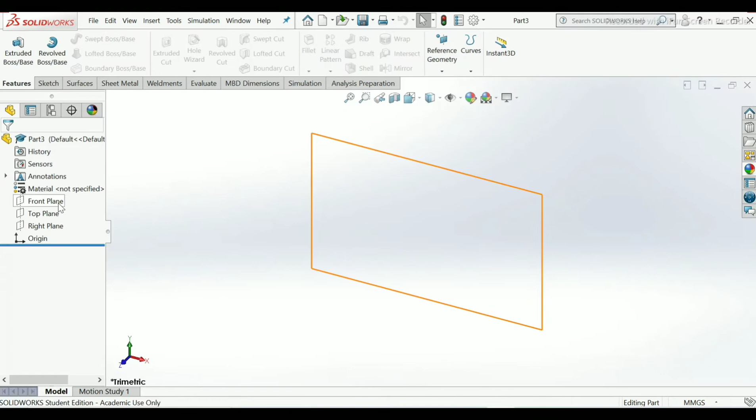So I will start to make it. Select new part. Okay. Take front plane sketch. Make two lines of different direction. That is, first in vertical direction to origin. Second is horizontal direction to origin.

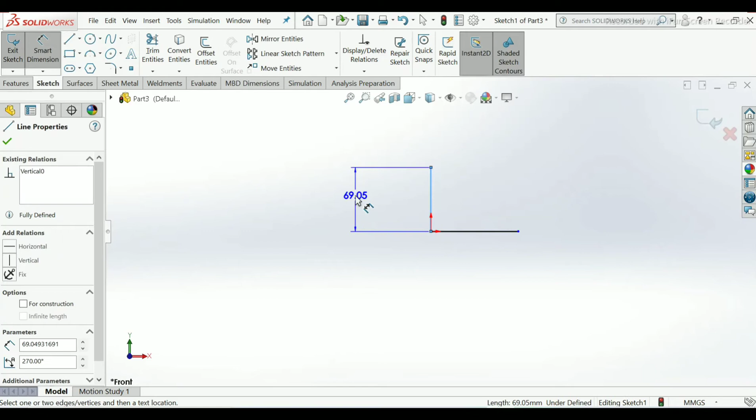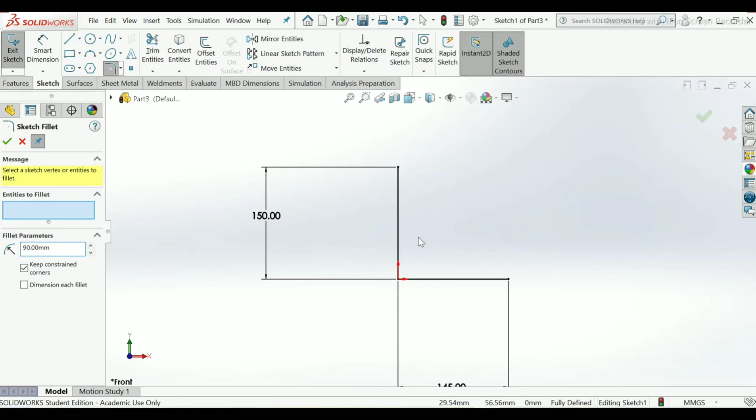Apply dimensions here. Take this vertical line as 150 mm. 150 mm. And this line take 145 mm. Okay. Select fillet, 90 mm. Okay. Exit the sketch.

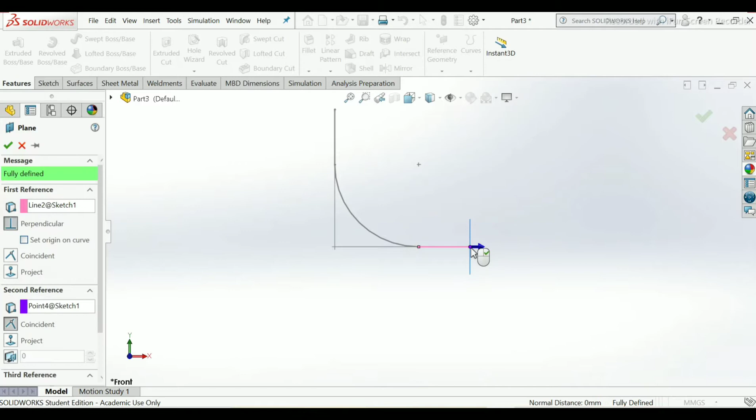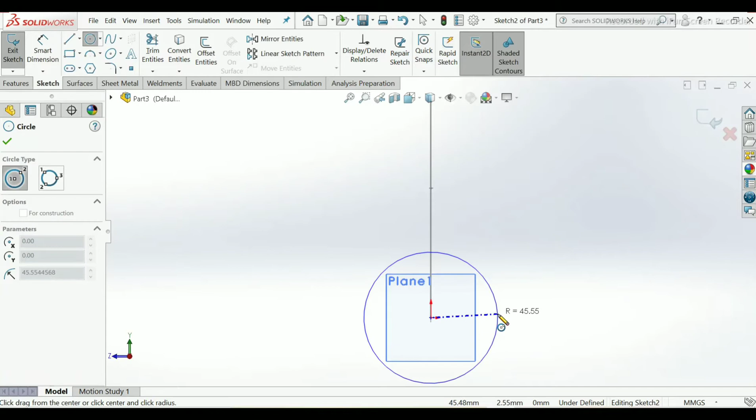Take reference geometry plane. Take this line. Select this point as a second reference. Click OK. Select this plane. Sketch. Normal to profile. Select circle from command manager. Take this circle, start from the origin point. Give this circle a dimension 97 mm diameter. Okay. Exit.

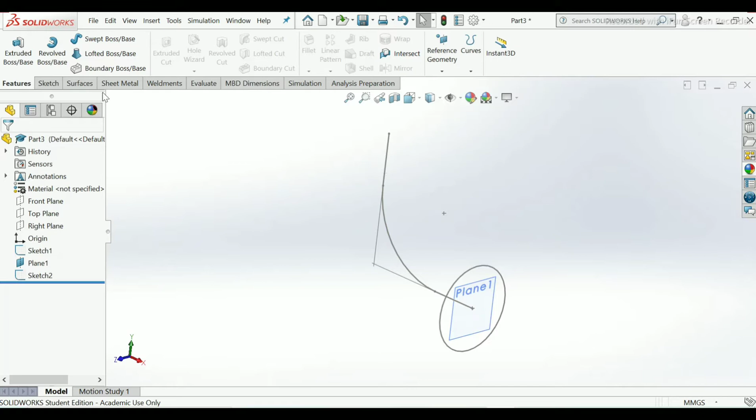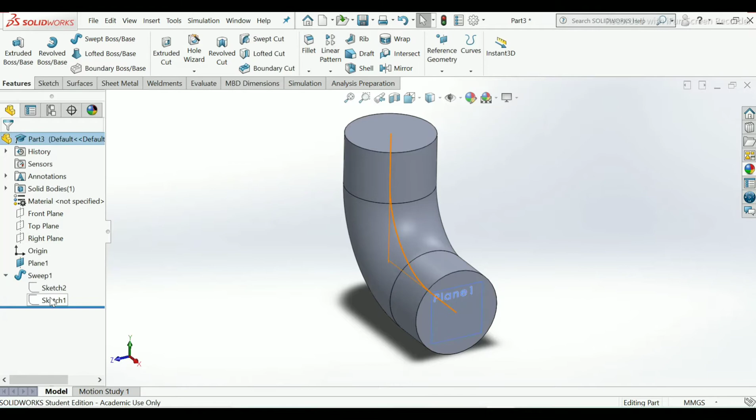Make sure that the line will be continuous. To make Swept Boss, select Swept Boss base, profile as a circle, path as this sketch. See, our Swept Boss is made. Click OK. Show this second sketch, first sketch.

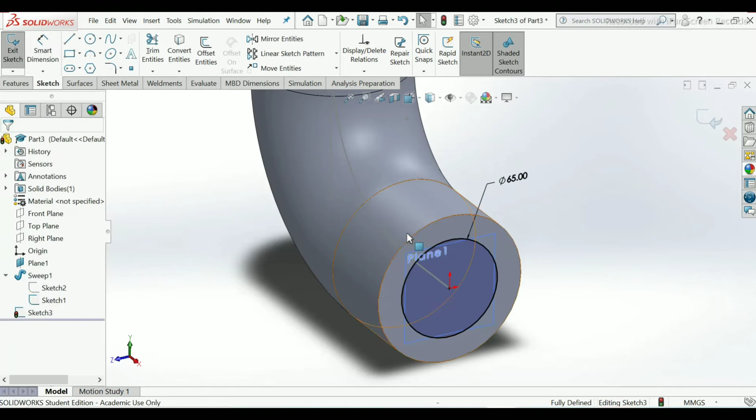Now again select plane, sketch, make one circle, so that it will make a hollow sketch. Now this circle will be 65 mm diameter. Okay. Exit. Use swept cut. Already the sketch was selected for profile circle. Now select path line. Okay. Our hollow component has been made.

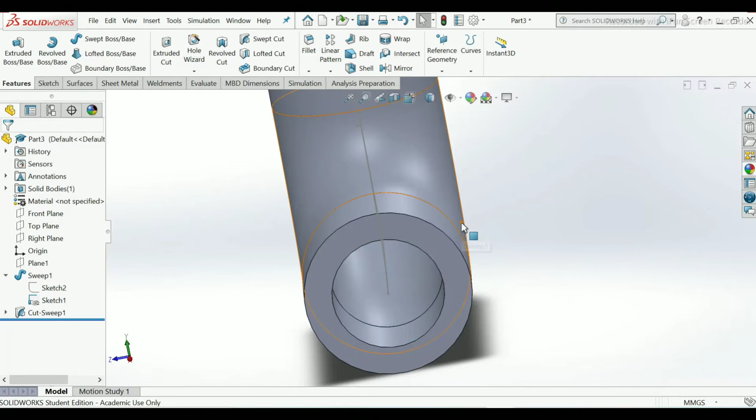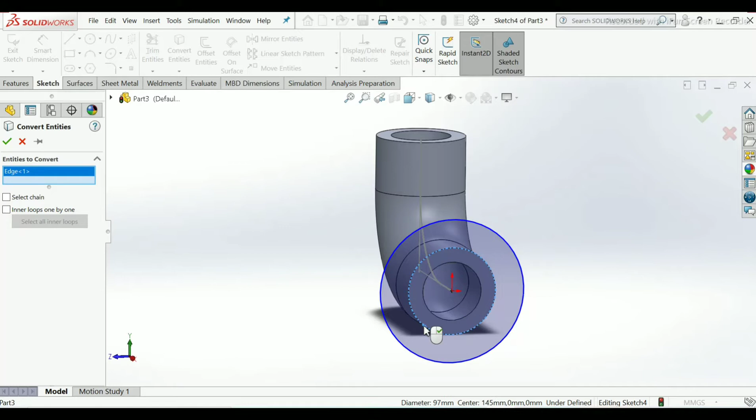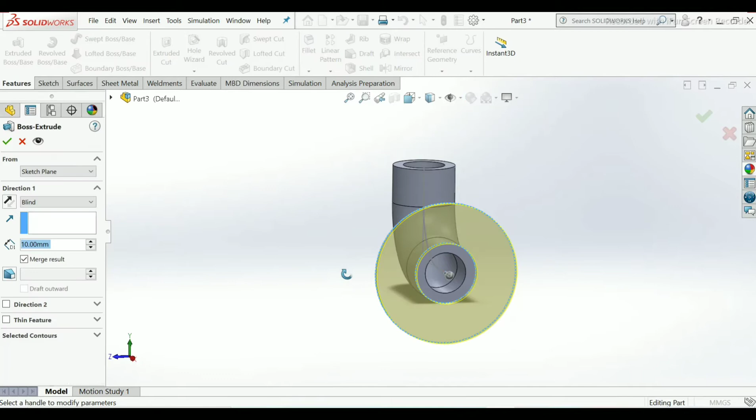Now hide this plane 1. Select this hollow section. Sketch. Normal to profile. Circle. Convert entities. Convert this projection line of bigger circle. Select diameter. Exit. 25 mm thickness will be okay.

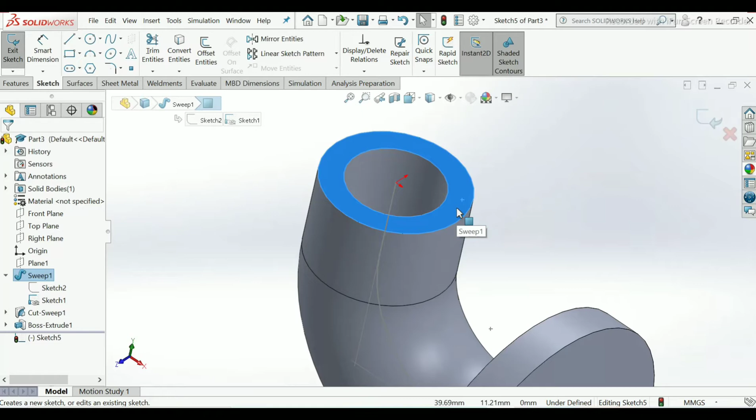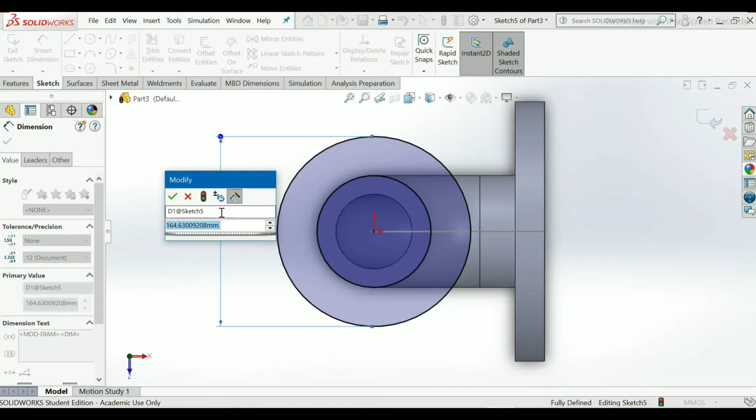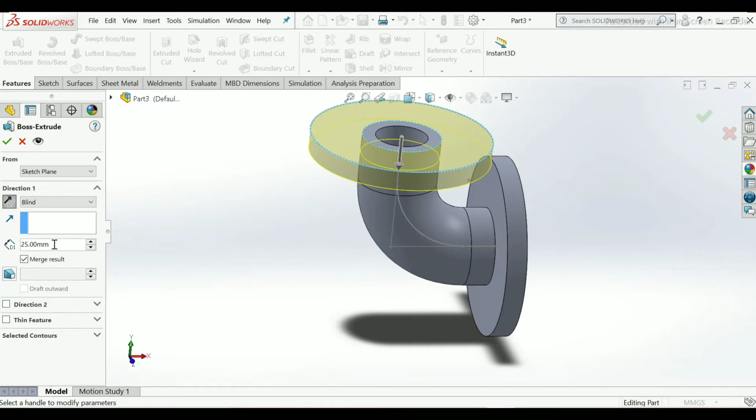For upper portion, select sketch this plane, hollow section plane. Normal to profile, circle, make this diameter as 225 again. Okay, exit the sketch, extrude as same procedure. Change this direction from reverse direction downwards. Thickness will be 25 mm. Click OK. Now hide this sketch 1.

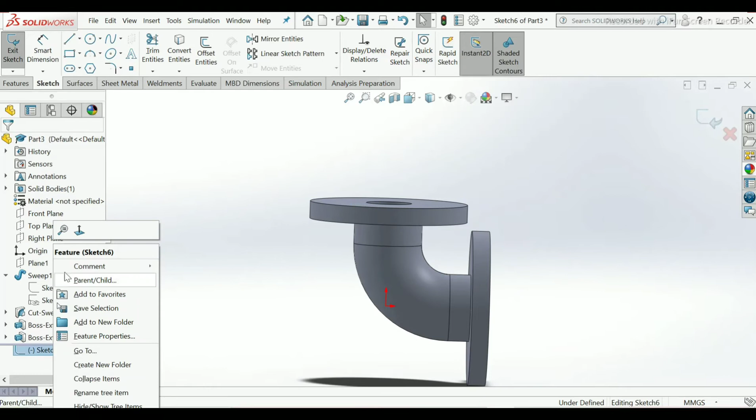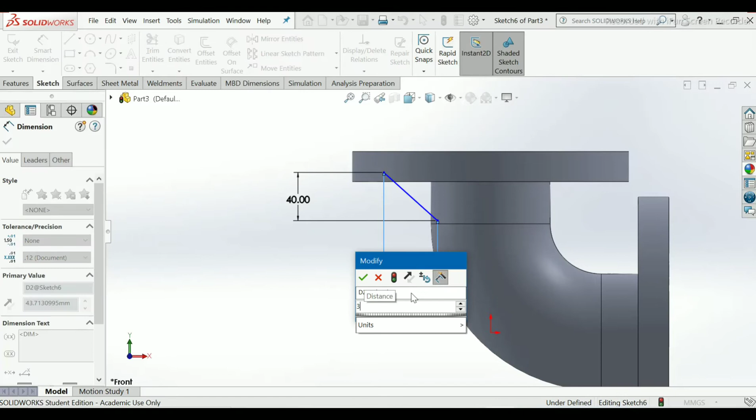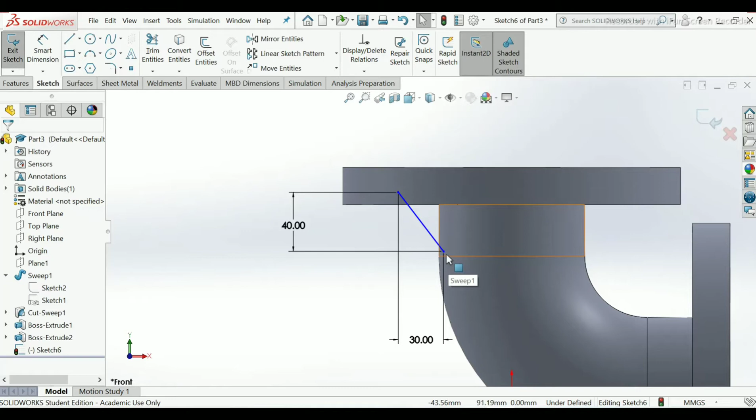For rib I will choose front plane sketch, normal to profile, select line, give the dimensions from point to this point. Height will be 40 mm and distance will be 30 mm. Make sure that for rib the line will be just little bit inside of the model, inside of the extrude material, so that rib will be properly made. Now confirm this sketch.

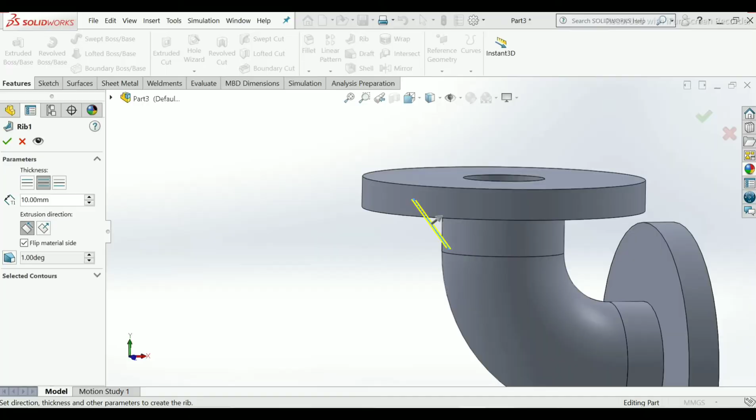Take rib command from command manager, from features. This goes outside, so I will flip the material side inside. Thickness will be 10 mm as shown in figure, 2D drawing figure. Click OK. Our rib has been made. I want to make 4 ribs in this section, so I will choose linear pattern.

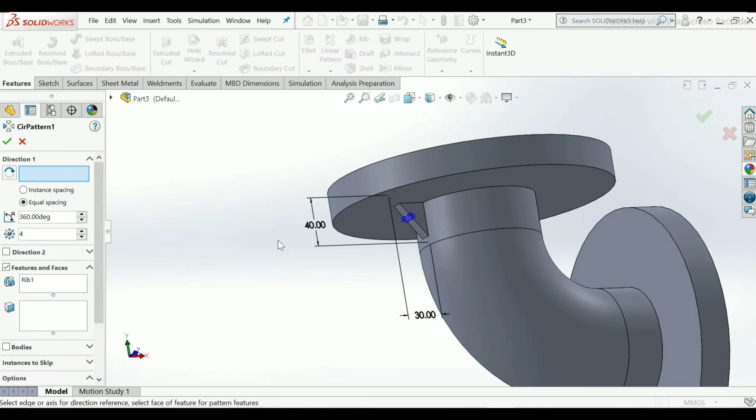From linear pattern select circular pattern, rib already selected. Choose the direction. I will choose this edge of this circle, extruded circle. See, it automatically selected. Number of instances will be 4. Click OK.

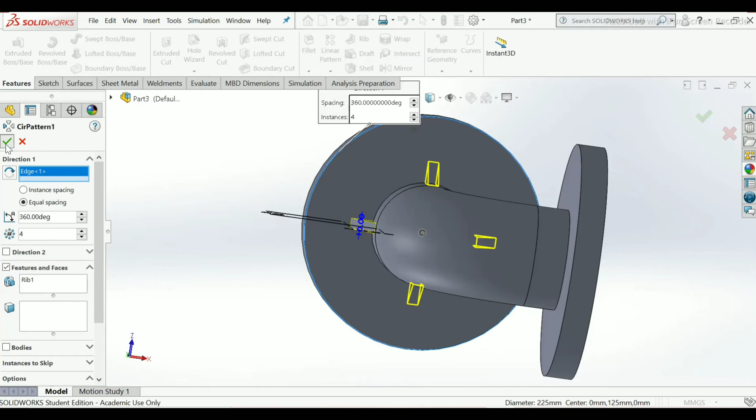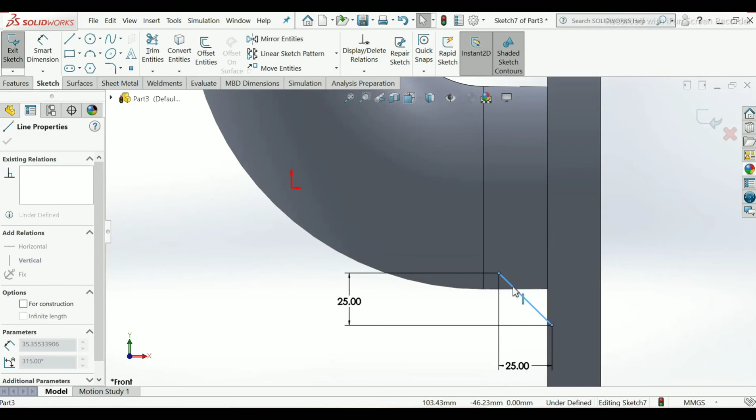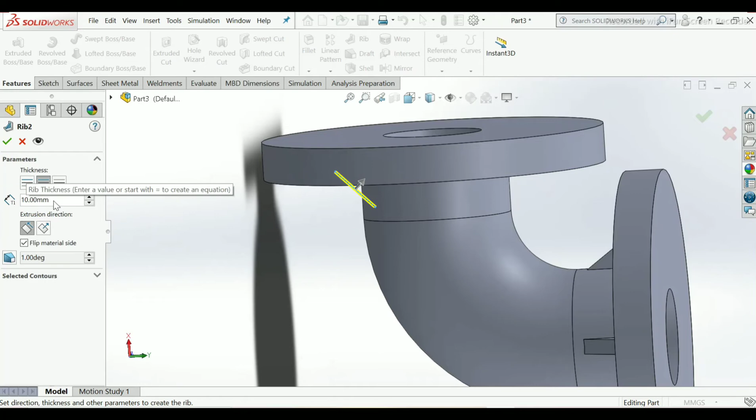Again I have to make ribs here, so I will choose front plane sketch, normal to profile, select line, make a dimension 25 mm. Next 25 mm. OK. Confirm this sketch. Make a rib. Flip the material inside. Thickness will be same 10 mm. Click OK. Our rib has been made.

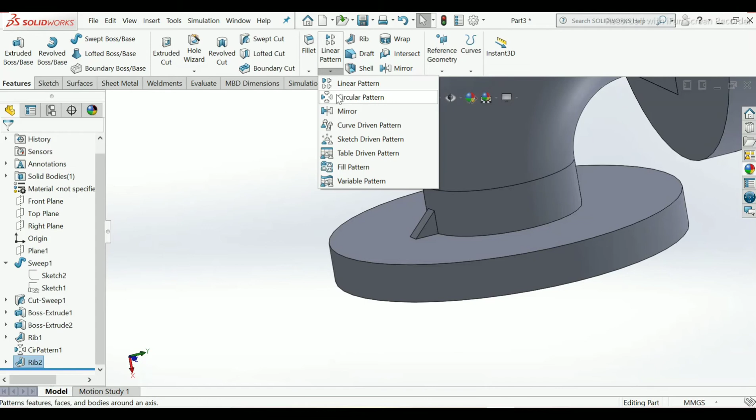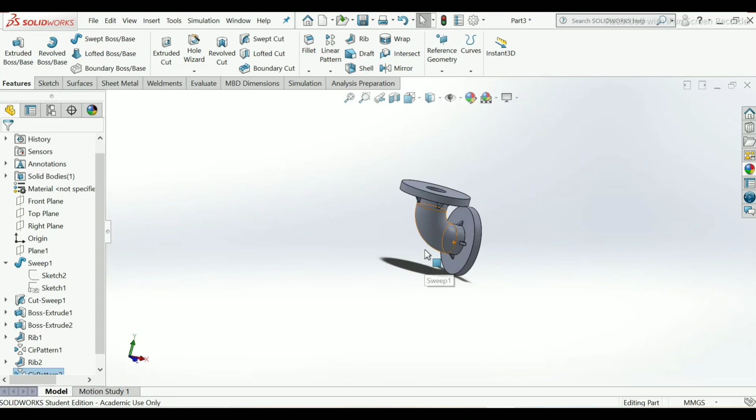Now again select circular pattern. Instance will be edge of the circle. Instances 4. Click OK. So our second rib pattern has been made. Now here it says 4 holes of diameter 15. PCD will be 185 from top of this extruded boss.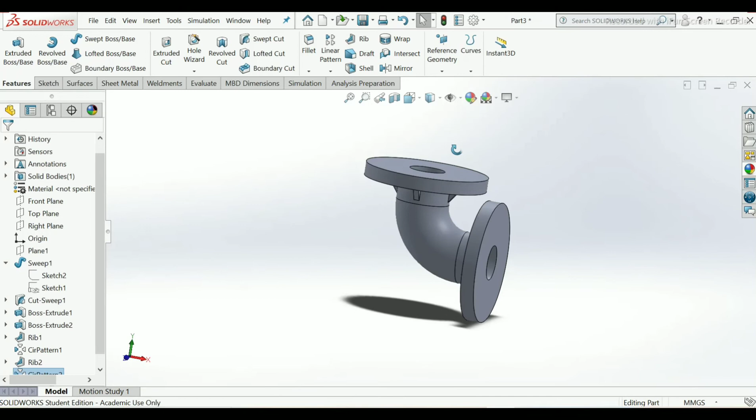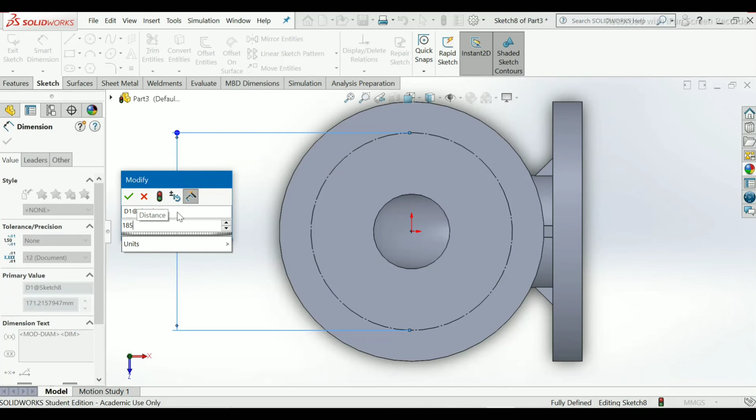So I will select this plane, sketch, normal to profile. Take circle from origin point. With this circle as for construction. Give dimension as 185 mm diameter. OK. Take again circle, smaller circle, smart dimension. Make this circle dimension as 15 mm diameter. OK. Select circular sketch pattern.

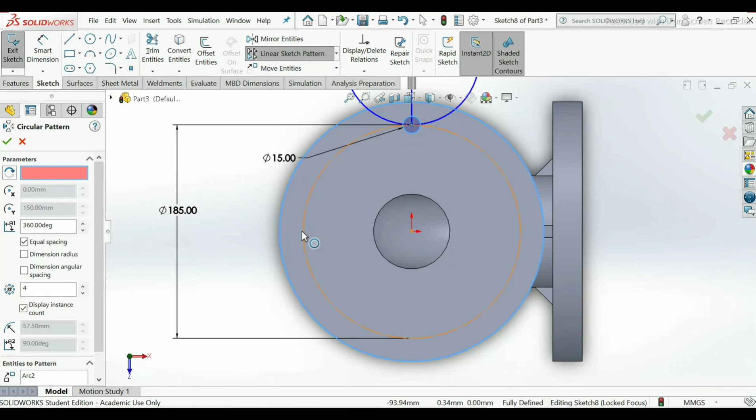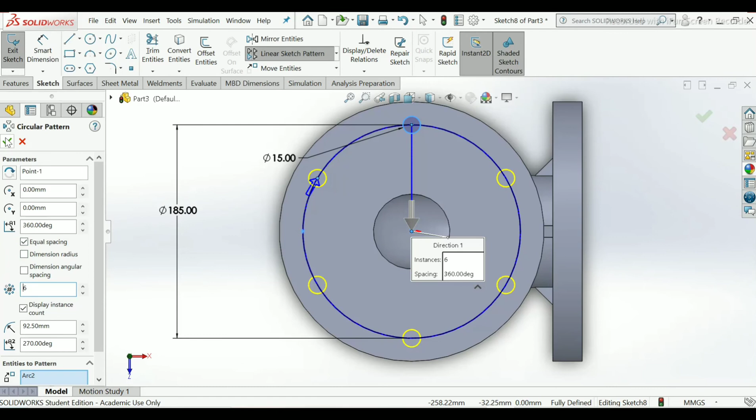Now here PCD will be again this only, edge of the circle. Entities to pattern this circle. Instances will be 6. OK. Exit. Now choose extrude cut from features. Cut will be 25 mm blind. Click OK.

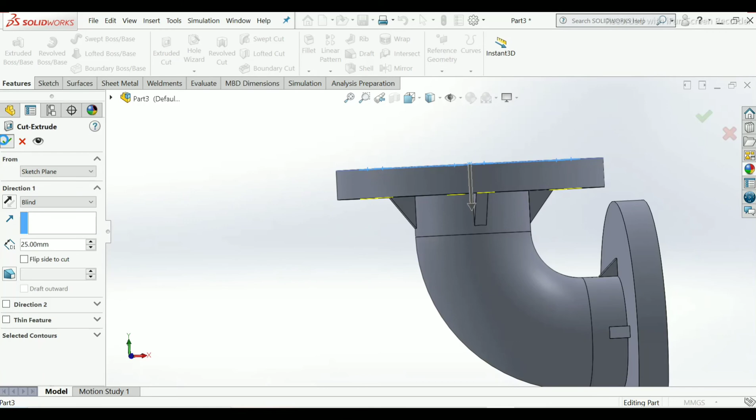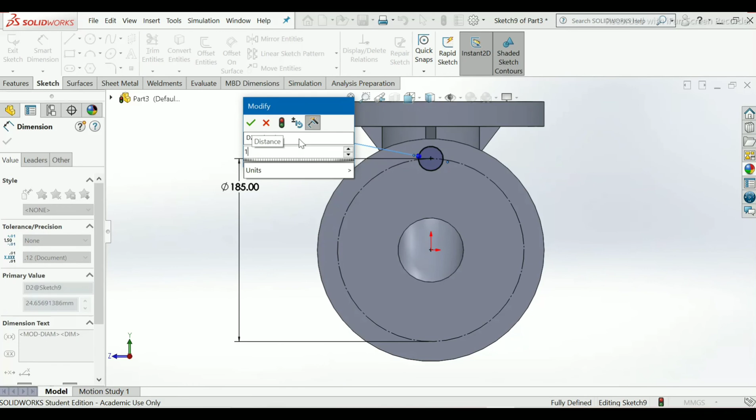Select display sketch, vertical plane, normal to profile. Take circle. Make this circle as construction circle. OK. Give dimension 185 mm diameter. OK. Take this circle again. It should be vertical to the origin point. Smart dimension. Diameter will be 15. OK.

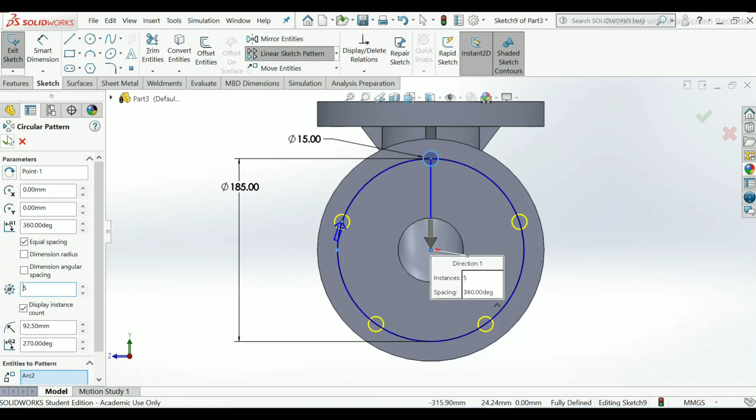Use circular sketch pattern. Entities to pattern will be sketch circle diameter 15 mm. Instances will be 5 now on this. Earlier it was 6, but now we have to choose 5. OK. Exit. Again choose extrude cut. Blind will be 25 mm cut. So click OK.

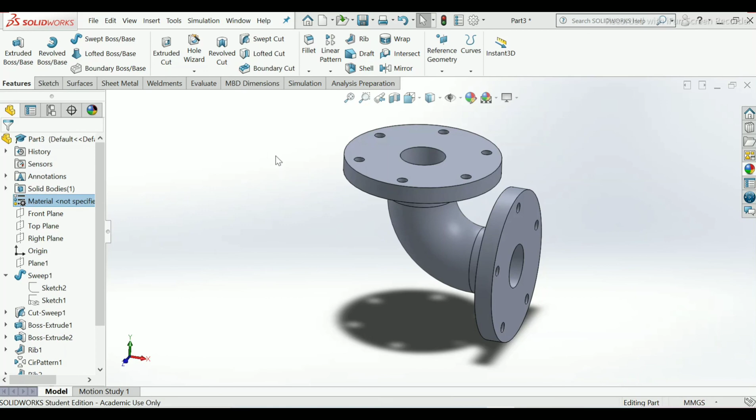Now our model has been made. It says elbow made up of cast iron, so I will apply material on our solid model. Here material is not specified, so right click, edit material, choose iron, grey cast iron, or any of this, but I will prefer grey cast iron. Here it gives some properties and their values and units. You can also check this. Click apply, then close. See, our whole model has been made.